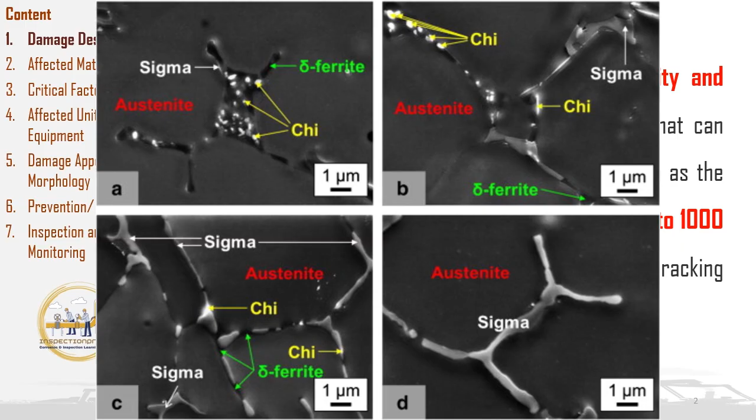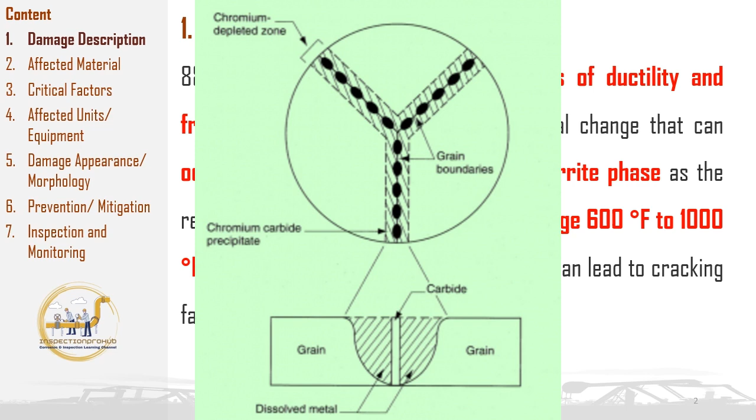Why does this happen in ferritic stainless steels? Ferritic stainless steels typically contain 10.5 to 30% chromium and have a body-centered cubic crystal structure. When exposed to the temperature range of 600 to 1000 degrees Fahrenheit, certain crystalline phases, like the sigma phase and chi phase, can form. These phases are brittle, and their formation weakens the material, making it more susceptible to cracking. In addition, chromium carbide precipitation can occur at grain boundaries. This carbide formation depletes the surrounding areas of chromium, lowering the steel's overall resistance to corrosion and mechanical strength.

In this section, we're going to dive into the specific types of stainless steels and weld metals that are most susceptible to this phenomenon.

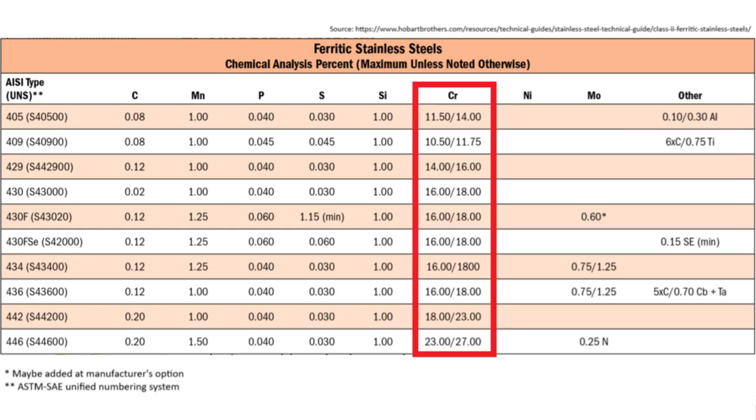First is 400 series stainless steels, including alloys such as 405, 409, 410, 410S, 430, and 446, which are primarily ferritic in structure. These steels generally contain 12 to 30% chromium as their main alloying element and have a body-centered cubic crystal structure. 400 series stainless steels are often used in applications where oxidation resistance and good strength at elevated temperatures are required, such as in exhaust systems and heat exchangers. However, when exposed to intermediate temperatures in the range of 600 to 1000 degrees Fahrenheit, these alloys become prone to 885 degrees Fahrenheit embrittlement.

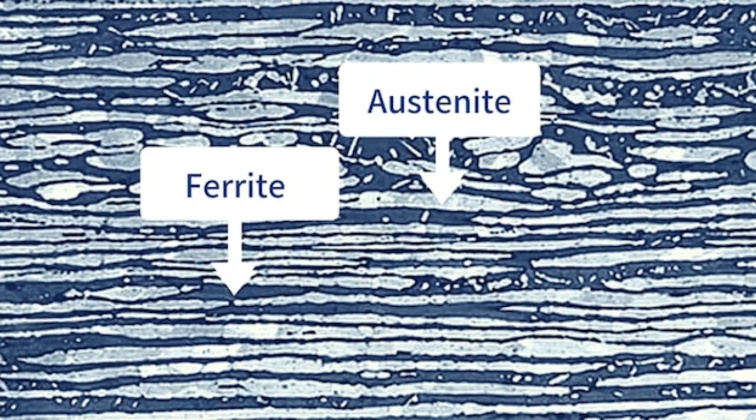Second is duplex series stainless steels. Duplex stainless steels such as 2205, 2304, and 2507 combine a roughly equal mix of ferrite and austenite phases to achieve higher strength and enhanced resistance to corrosion, particularly in harsh environments like marine or petrochemical applications. While duplex stainless steels are highly resistant to corrosion and stress corrosion cracking, they can also suffer from embrittlement when exposed to temperatures between 600 to 1000 degrees Fahrenheit.

In this temperature range, the balance of ferrite and austenite phases can be disturbed, leading to the precipitation of embrittling phases, particularly the sigma phase, which significantly reduces toughness and ductility. This makes duplex stainless steels more susceptible to cracking and failure if they are exposed to thermal cycling or improper welding conditions that promote these phase changes.

Third is austenitic stainless steel weld metals in the 300 series. Austenitic stainless steels in the 300 series, such as 304 and 316, are commonly used in welded applications due to their excellent corrosion resistance, formability, and toughness. During welding, however, these alloys typically contain a small amount of ferrite, around 5 to 10%, in the weld metal to prevent hot cracking that can occur during solidification.

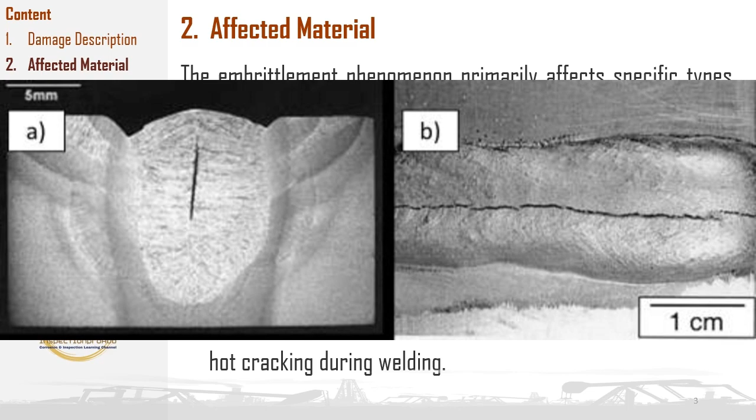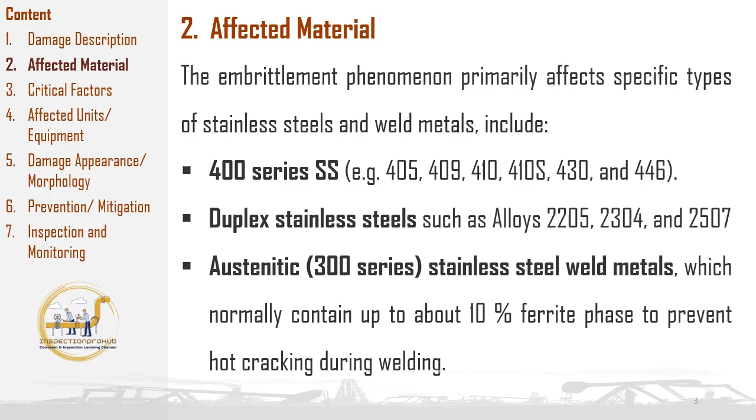This ferrite is beneficial during the welding process, but when the weld metal is exposed to temperatures between 600 to 1000 degrees Fahrenheit, it can undergo a transformation into brittle phases, like the sigma phase, which can embrittle the weld. This embrittlement leads to reduced ductility and fracture toughness, making the weld joints more susceptible to cracking under stress or in service, especially in high temperature or cyclic loading conditions.

Understanding the critical factors is about protecting valuable infrastructure and avoiding costly, catastrophic failures. In this section, we're going to explore the key influences in detail. So let's dive in and uncover the hidden drivers behind this dangerous phenomenon.

First, critical factors influencing embrittlement are alloy composition, particularly chromium content and the amount of ferrite phase, and the operating temperature. Chromium content plays a crucial role in enhancing corrosion resistance, but at elevated temperatures, typically between 600 to 1000 degrees Fahrenheit, high chromium levels can promote the formation of brittle phases like sigma phase, which degrade the material's ductility and fracture toughness.

The presence of a ferrite phase, especially in ferritic and duplex stainless steels, also increases susceptibility to embrittlement at these temperatures, as ferrite can transform into brittle phases that weaken the material. The operating temperature is equally critical. Prolonged exposure to temperatures in the embrittlement range allows for phase transformations that reduce the steel's ability to absorb stress, increasing the risk of cracking and failure. Hence, proper control of both alloy composition and temperature is essential to mitigate embrittlement and maintain material integrity in high-temperature environments.

Second critical factor is chromium content. Chromium content plays a critical role in the susceptibility of stainless steels to embrittlement. Alloys with lower chromium content, such as 405, 409, 410, and 410S, exhibit a reduced tendency for embrittlement compared to higher chromium materials like 430, which contain 16 to 18% chromium, and 446, which contain 23 to 27% chromium, and duplex stainless steels, which contain 22 to 25% chromium, which are more vulnerable to this phenomenon.

On 300 series stainless steel weld metals, although embrittlement has not been extensively observed across all, Charpy impact tests on Type 308 and Type 347H weld metals aged at around 850 to 885 degrees Fahrenheit have shown signs of embrittlement, with some samples showing impact values below 15 foot-pounds at ambient temperatures. Despite these findings, embrittlement is generally not a major concern in typical refining applications where these materials are commonly used.

Third critical factor is the amount of ferrite phase in duplex stainless steels. The amount of ferrite in duplex stainless steels is a crucial factor influencing their high-temperature performance and susceptibility to embrittlement. As ferrite content increases, the material becomes more vulnerable to damage when exposed to the critical high-temperature range, which raises the ductile-to-brittle transition temperature, making it more prone to brittle fracture.

To mitigate this risk, duplex stainless steels must be cooled rapidly after welding to prevent the formation of detrimental phases, such as sigma phase or delta ferrite, which can significantly impair the material's toughness and corrosion resistance. Careful control of ferrite content and cooling rates is therefore essential to maintaining the integrity of duplex stainless steels in high-temperature environments.

Fourth critical factor is high-temperature exposure. High-temperature exposure is a key factor in the embrittlement of stainless steels, with damage typically occurring when materials are subjected to prolonged periods within the critical temperature range, around 885 degrees Fahrenheit. The extent of embrittlement depends on both the temperature and the duration of exposure, as damage is cumulative over time.

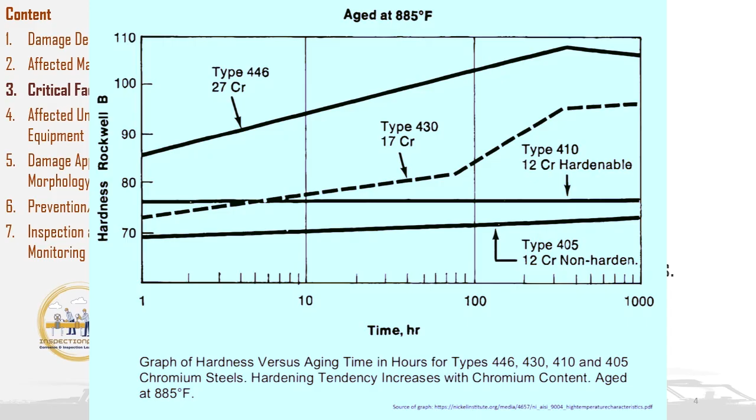At temperatures beyond the critical threshold, achieving maximum embrittlement may require significantly longer exposure. For example, at 600 degrees Fahrenheit, it may take thousands of hours for the embrittling phases to fully develop. Therefore, managing exposure times at elevated temperatures is critical to preventing premature failure due to embrittlement.

Fifth critical factor is the duration of service in high-temperature environments. The duration of service in high-temperature environments is a crucial factor in the embrittlement of materials, as prolonged exposure to elevated temperatures can lead to significant degradation over time. In practical terms, materials exposed to temperatures ranging from 600 to 1000 degrees Fahrenheit for extended periods, typically over many years of service, are generally considered to have been affected by embrittlement.

This is because such exposure can promote the formation of embrittling phases, such as the alpha prime phase, which compromise the material's toughness and mechanical properties. As a result, equipment operating in this temperature range for extended periods may experience increased vulnerability to brittle fracture and failure.

Sixth critical factor is the impact of temperature fluctuations on toughness. Temperature fluctuations can significantly affect the toughness of materials, particularly when they experience rapid cooling or heating during plant shutdowns, startups, or upset conditions. While the impact on toughness may not be pronounced at the steady operating temperature, sudden drops in temperature can cause materials to become brittle, especially if they are already susceptible to embrittlement due to prior high-temperature exposure.

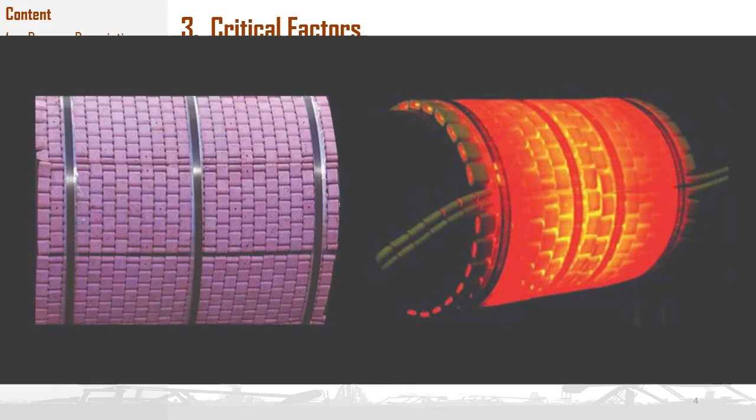Heat treatment plays a significant role in the potential for embrittlement in materials, particularly if they are held at or slowly cooled through the embrittlement temperature range. When materials are exposed to this critical range, typically between 600 to 1000 degrees Fahrenheit, and undergo slow cooling, it allows for the formation of embrittling phases, such as the alpha prime phase, which degrade the material's toughness and ductility.

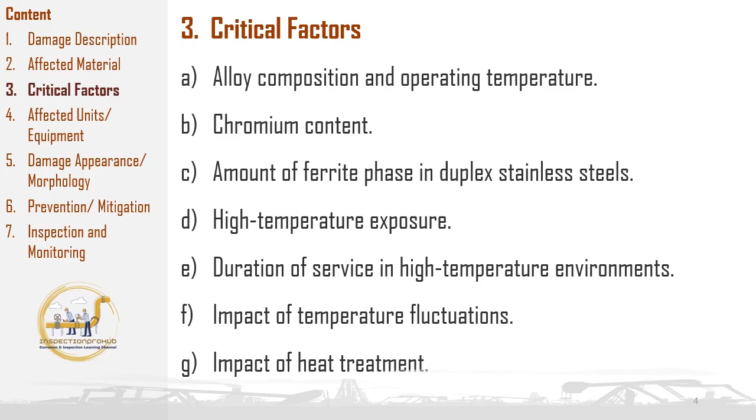This can severely compromise the material's integrity, making it more susceptible to brittle fracture. To avoid this, heat treatment processes must be carefully controlled, ensuring that materials are rapidly cooled or quickly moved through the embrittlement range to maintain their mechanical properties and performance.

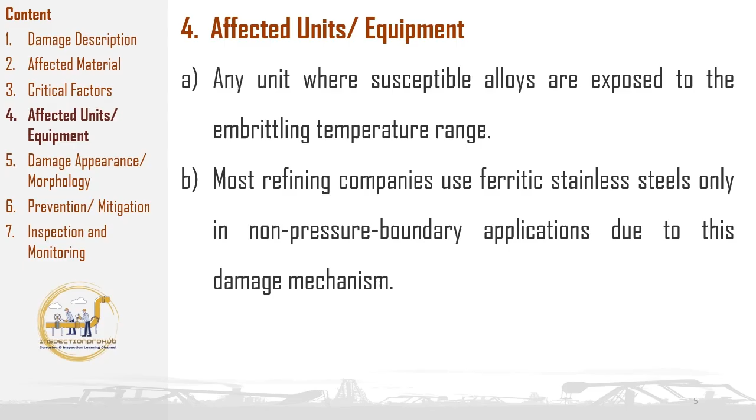Up next, in this section 4, we'll delve into units and equipment affected by 885 degrees Fahrenheit embrittlement. Units and equipment affected by embrittlement include any system where susceptible alloys, particularly ferritic stainless steels and duplex stainless steels, are exposed to temperatures within the embrittling range of approximately 600 to 1000 degrees Fahrenheit. Most refining companies, aware of this damage mechanism, limit the use of ferritic stainless steels to non-pressure boundary applications where the risk of embrittlement poses less of a hazard. By restricting these materials to less critical areas, companies can better manage potential embrittlement-related damage and enhance overall equipment reliability.

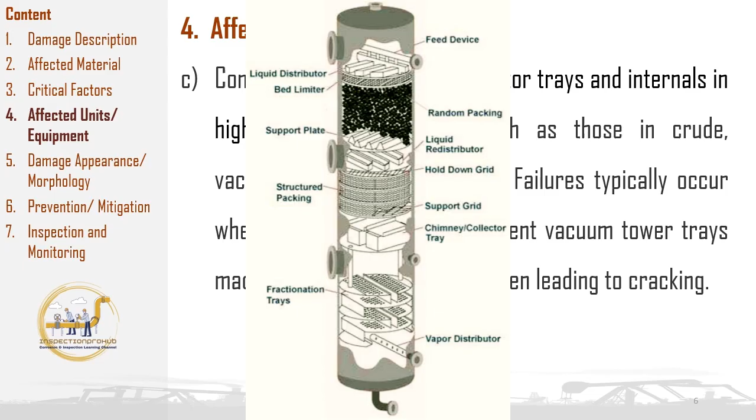Affected units and equipment commonly include fractionator trays and internals in high-temperature vessels, particularly within crude, vacuum, fluid catalytic cracking, and coker units. These components are often exposed to temperatures that can lead to embrittlement, especially when made from ferritic stainless steels like Type 409 and 410. Failures are frequently observed during maintenance activities such as welding or straightening of vacuum tower trays, as the heat exposure in these processes can induce or worsen brittle phases in the material, making it more susceptible to cracking. Proper handling and careful control of welding practices are essential to minimize this risk and maintain equipment integrity in high-temperature environments.

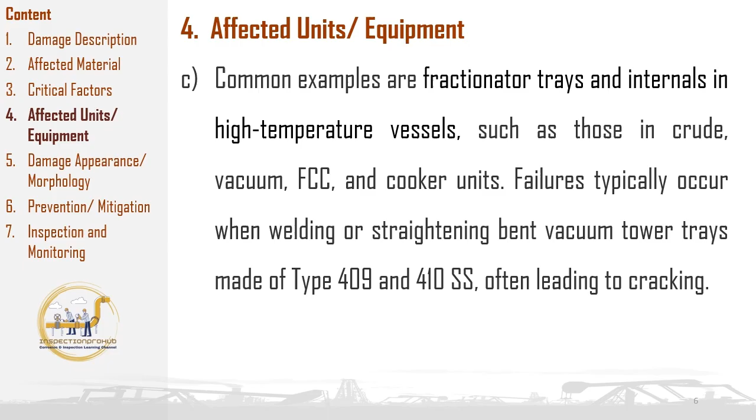Duplex stainless steel heat exchanger tubes and other components exposed to temperatures above 600 degrees Fahrenheit for extended periods are particularly vulnerable to embrittlement. Duplex stainless steels are designed for use below this temperature limit, because prolonged exposure to higher temperatures can disturb the balance between the ferrite and austenite phases, leading to the formation of brittle phases such as sigma phase. This phase transformation reduces toughness and increases the risk of cracking and failure under stress. As a result, the maximum service temperature for duplex stainless steels is typically set at 600 degrees Fahrenheit to preserve their mechanical integrity and corrosion resistance in demanding environments.

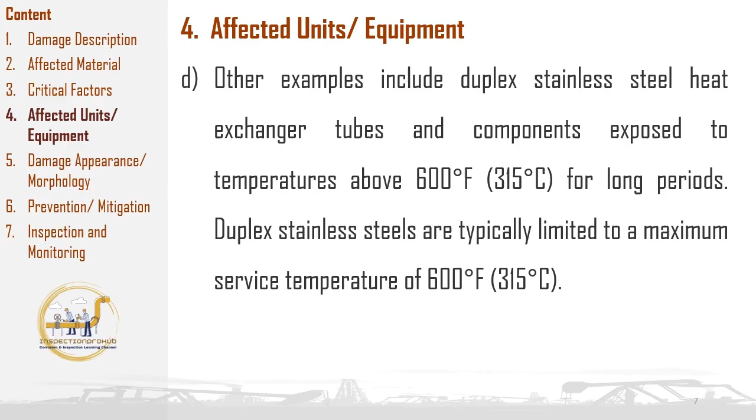In this section 5, we'll explore the visual characteristics and morphology of damage to better understand its underlying causes. 885 degrees Fahrenheit embrittlement in stainless steels is a metallurgical change that results in the formation of brittle phases, reducing the material's toughness and ductility. This embrittlement does not produce visible signs that can be detected through standard visual or microscopic examination, as it affects the steel's internal structure on a level that doesn't alter its outward appearance. Instead, the damage is primarily identified by a loss in mechanical properties, particularly a reduction in impact resistance, which can increase the risk of brittle fracture under stress.

Specialized testing methods that measure changes in mechanical behavior, such as impact testing, are therefore required to detect this type of embrittlement. Embrittlement at 885 degrees Fahrenheit occurs when materials are subjected to prolonged high-temperature exposure, causing microstructural changes that degrade their ductility and toughness. This process can be detected by an increase in hardness, indicating a loss of toughness and heightened brittleness. In addition to hardness tests, bend or impact tests on service-aged samples often demonstrate reduced capacity to resist deformation or absorb energy, leading to failure. These tests are essential for identifying materials prone to embrittlement, helping ensure the reliability and integrity of components exposed to high temperatures in industrial settings.

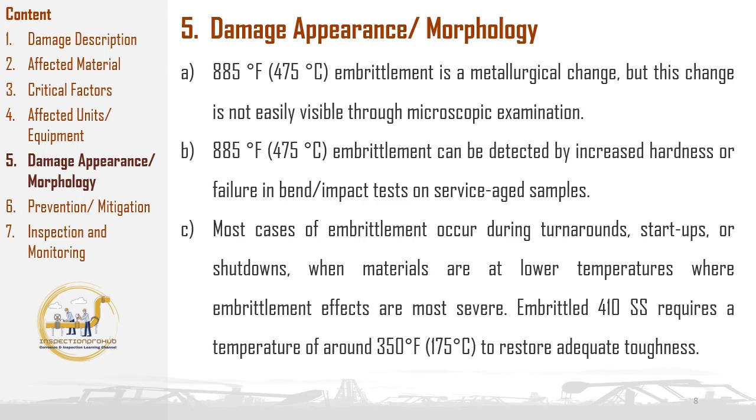Embrittlement commonly occurs during turnarounds, startups, or shutdowns, when materials, such as 410 stainless steel, are exposed to lower temperatures where embrittlement effects are most pronounced. To restore adequate toughness in embrittled 410 stainless steel, it requires heating to around 350 degrees Fahrenheit, allowing for the recovery of its mechanical properties and reducing the risk of failure during service. Proper temperature control during these critical phases is essential to prevent embrittlement and maintain material integrity.

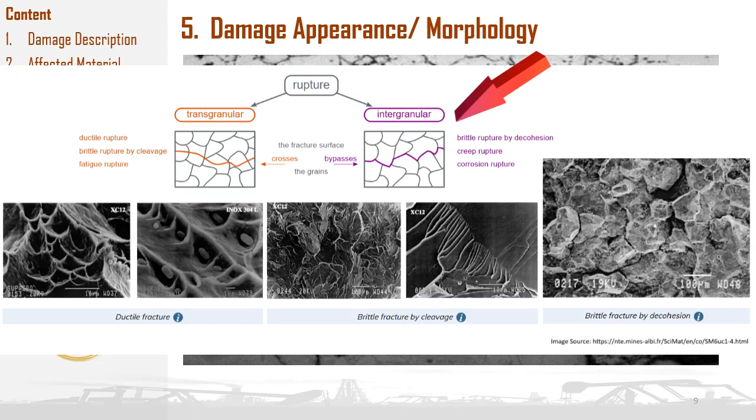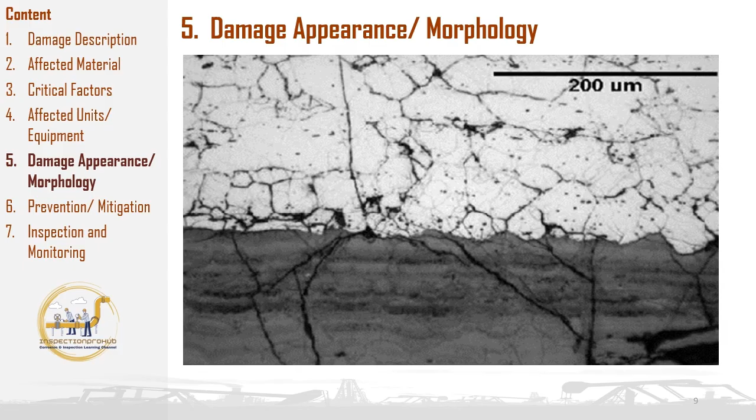This image showcases a sample of a material exhibiting severe embrittlement, as evidenced by the presence of intergranular cracks visible in its microstructure. These intergranular cracks occur along the grain boundaries of the material, indicating a weakening of the bonds between the grains rather than within the grains themselves. This type of cracking is a characteristic feature of embrittlement, which significantly reduces the material's ductility and fracture toughness. The visible damage highlights the potential for catastrophic failure under stress, particularly in high-temperature or chemically aggressive environments, where embrittlement mechanisms such as 885 degrees Fahrenheit embrittlement might be active. Identifying and analyzing such microstructural features are critical in evaluating the material's remaining life and ensuring structural integrity in service applications.

In this section 6, we'll explore the prevention and mitigation of 885 degrees Fahrenheit embrittlement, which involves several key strategies. The most effective approach is to avoid exposing susceptible materials, particularly ferritic stainless steels, to the critical temperature range of 600 to 1000 degrees Fahrenheit for extended periods.

When this is not feasible, it is recommended to use alternative materials that are not prone to this type of embrittlement, such as austenitic stainless steels or certain nickel-based alloys. In some cases, particularly for non-pressure-containing components like trays and internals, users may accept the associated risks and address any issues during routine maintenance, balancing operational needs with safety considerations.

Controlling temperatures during startup and shutdown procedures is crucial in preventing the cracking of embrittled materials. This method involves carefully managing heating and cooling rates to minimize the time spent in the critical temperature range.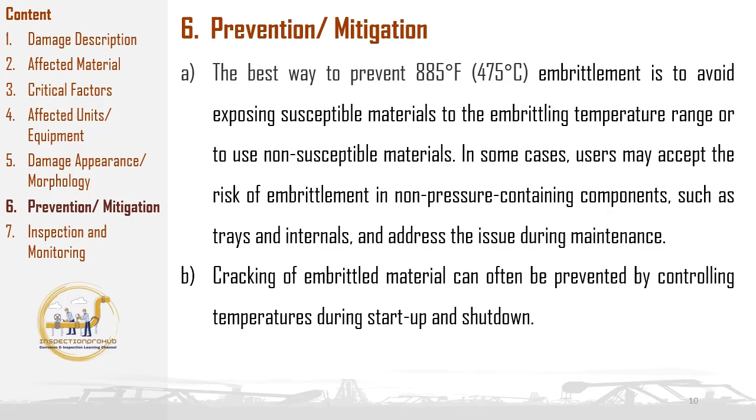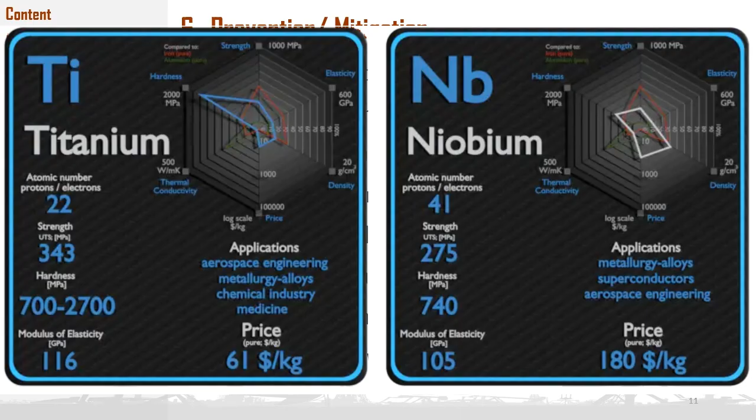The effects of 885 degrees Fahrenheit embrittlement can be significantly reduced by modifying the alloy's chemical composition, particularly by adjusting the chromium content or adding stabilizing elements like titanium or niobium. This approach can enhance the material's resistance to embrittlement at the critical temperature range.

However, it's important to note that these resistant materials may not always be readily available in commercial forms, which can limit their application in certain industries or for specific components. This constraint necessitates careful planning and potentially longer lead times for material procurement.

One of the notable characteristics of 885 degrees Fahrenheit embrittlement is its reversibility through appropriate heat treatment. This process typically involves heating the affected material to temperatures of 1100 degrees Fahrenheit or higher, followed by rapid cooling. This heat treatment effectively dissolves the precipitates responsible for embrittlement, restoring the material's ductility and toughness.

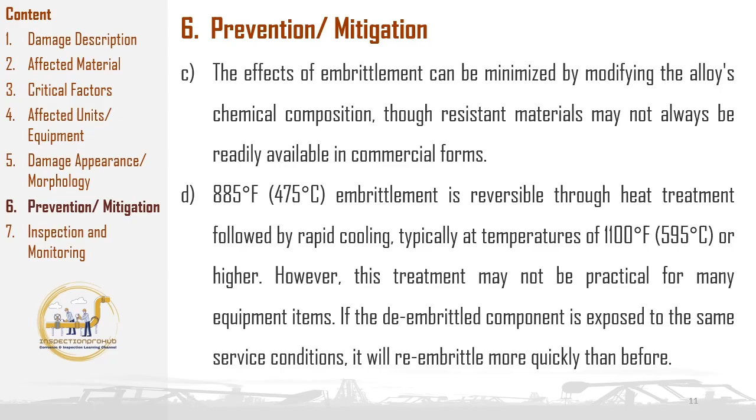However, it's crucial to recognize that this treatment may not be practical for many equipment items due to size, complexity, or operational constraints. Furthermore, if a de-embrittled component is re-exposed to the same service conditions that caused the initial embrittlement, it will tend to re-embrittle more quickly than before, necessitating careful consideration of long-term material management strategies.

In this last section, Section 7, we'll talk about inspection and monitoring of 885 degrees Fahrenheit embrittlement. Inspection and monitoring present significant challenges due to the nature of this damage mechanism. Detecting this damage is challenging before equipment fails, as it develops gradually over time in service, making online inspection ineffective.

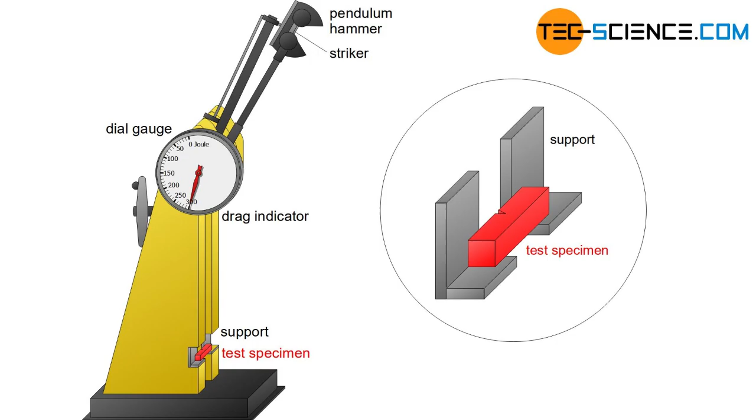The most effective and reliable method for detecting or confirming this type of embrittlement involves removing a sample of the suspect material and subjecting it to impact or bend testing. This approach is particularly useful for thin components such as tower trays, where a simple bend test failure can provide strong evidence of embrittlement.

It's important to note that metallographic examination is generally not effective in identifying this damage mechanism, as the embrittlement-causing phase is often difficult to observe in the microstructure.

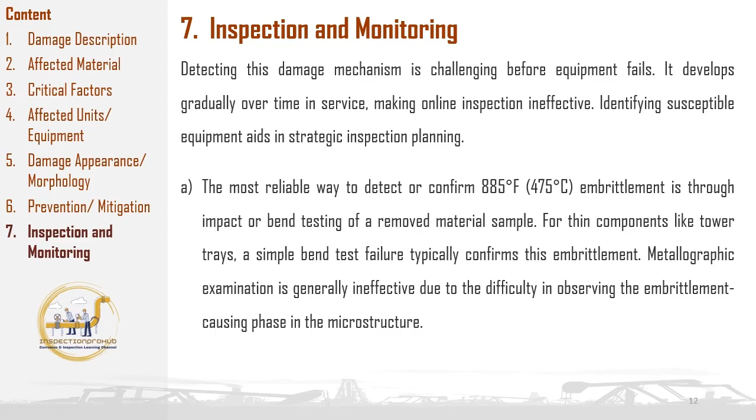Given these limitations, a proactive approach to inspection is crucial. This includes closely monitoring equipment exposed to the critical temperature range of 600 to 1000 degrees Fahrenheit and developing targeted inspection strategies. Visual inspection can be effective in certain scenarios, particularly for non-pressure-containing components such as trays and other hardware.

Cracking may become visually apparent during maintenance or repair activities, providing a clear indication of embrittlement. The visual inspection method, while straightforward, is limited to detecting damage that has already progressed to a visible stage.

Field hardness testing offers a potential means of distinguishing between embrittled and non-embrittled materials. However, it's important to note that hardness testing alone is generally not definitive in diagnosing 885 degrees Fahrenheit embrittlement. Moreover, the hardness test itself can potentially induce cracking in severely embrittled materials, adding a layer of complexity to this inspection method.

Hammer testing, also known as field impact testing, is considered a destructive test and should be approached with caution. This method involves tapping a suspect component with a hammer, which may cause cracking depending on the degree of embrittlement. While hammer testing can confirm that a component is not severely embrittled if it doesn't crack, or that it is embrittled if it does crack, it carries the risk of damaging the component being tested.

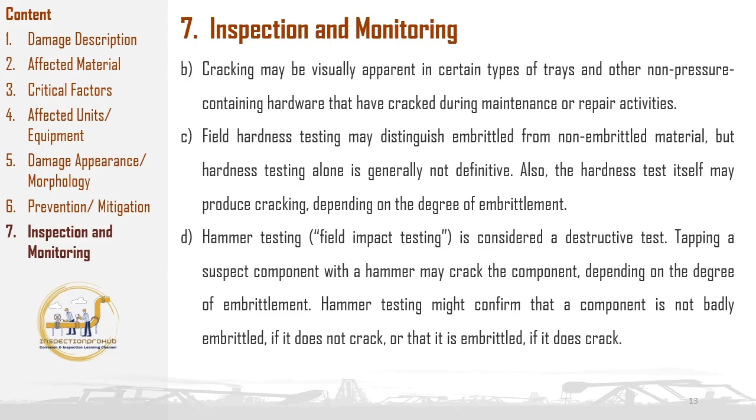This technique should only be used when the potential for component damage is acceptable and other non-destructive methods have been exhausted.